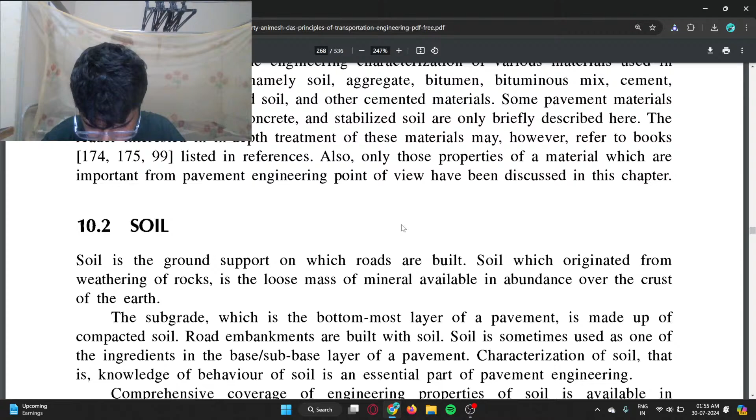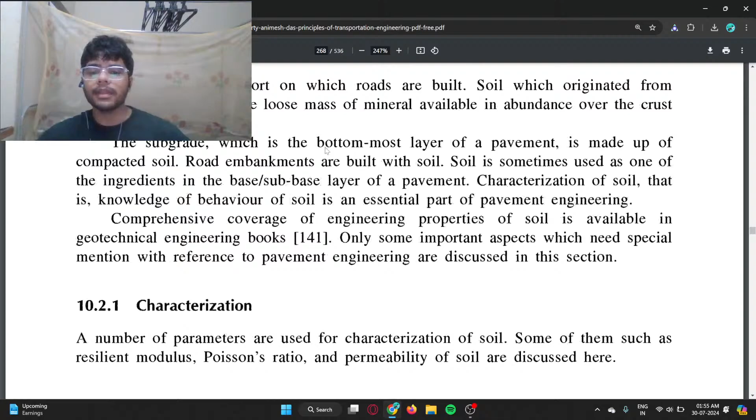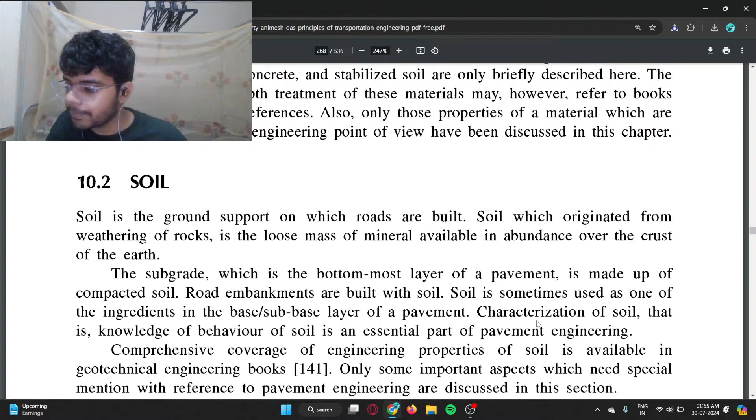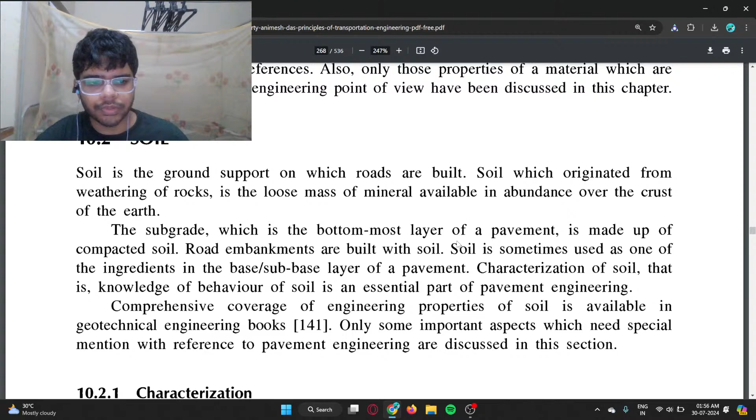Soil, which originated from weathering of rocks, is a loose mass of mineral abundance over the crust of the earth. The subgrade, which is the bottommost layer of the pavement, is made up of compact soil. Road embankments are built with soil. Soil is sometimes used as one of the ingredients in the base/sub-base layer of the pavement. Characterization of soil, that is knowledge of behavior of soil, is an essential part of pavement engineering. Comprehensive coverage of engineering properties of soil is available in Geotechnical Engineering books. Only some important aspects, which need special mention with reference to pavement engineering, are discussed in this section.

Number of parameters are used for characterization of soil, some of them such as resilient... Only some important aspects, which need special mention with reference to pavement engineering, are discussed in this section. Number of parameters are used for characterization of soil, some of them such as resilient...

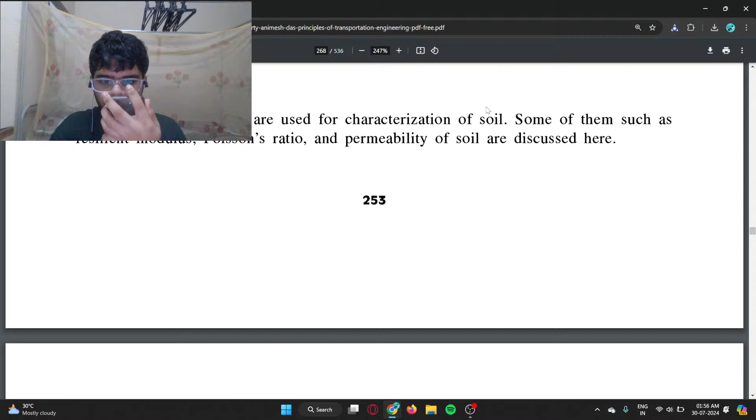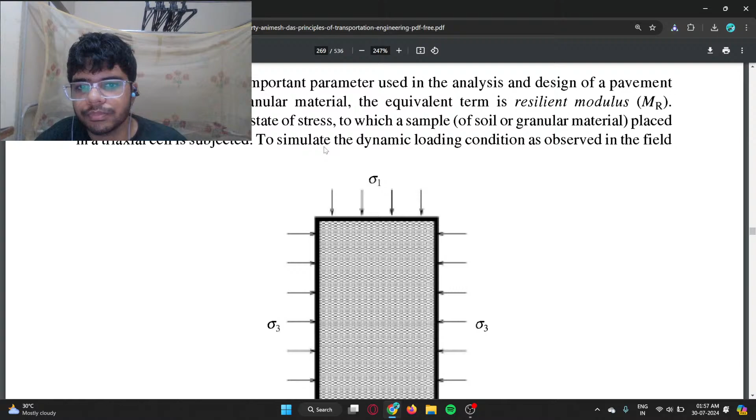We want to show the triaxial state of stress to which a sample placed in a triaxial cell is subjected, to simulate the dynamic loading conditions as observed in the field. Due to traffic, the stress sigma 1 minus sigma 3 is made pulsating. This dynamic nature of triaxial testing is intended to match the loading and unloading durations in the same way as they occur in the in-service road. Deformation of samples occurs when the load is applied to it, and recovery takes place when the load is removed.

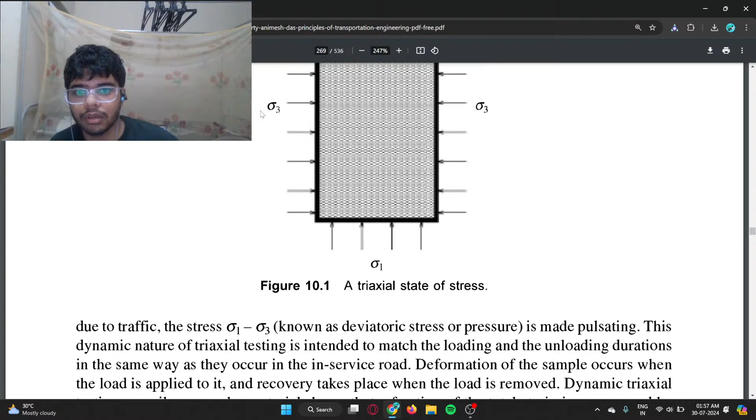I'm just reading words, I'm not even comprehending what I'm saying. Okay, due to traffic, the stress sigma 1 minus sigma 3, known as deviatoric stress or pressure, is made pulsating.

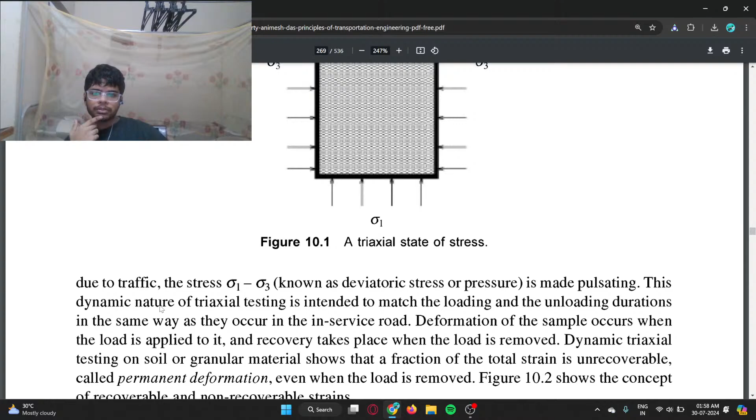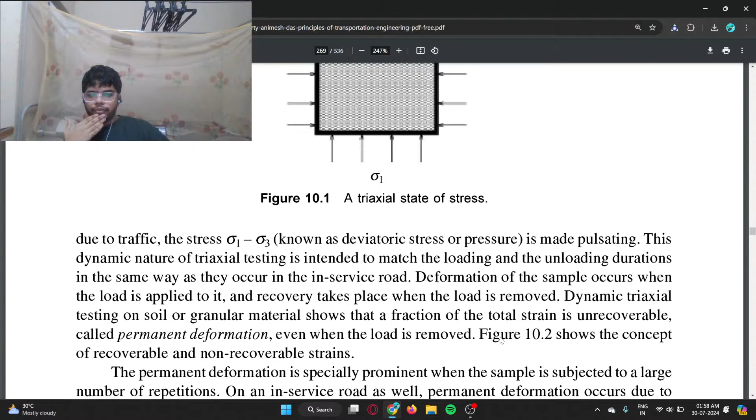Dynamic triaxial testing on a soil or a granular material shows that a fraction of the total strain is unrecoverable, called permanent deformation, even when the load is removed. Figure 10.2 shows the concept of recoverable and non-recoverable strains.

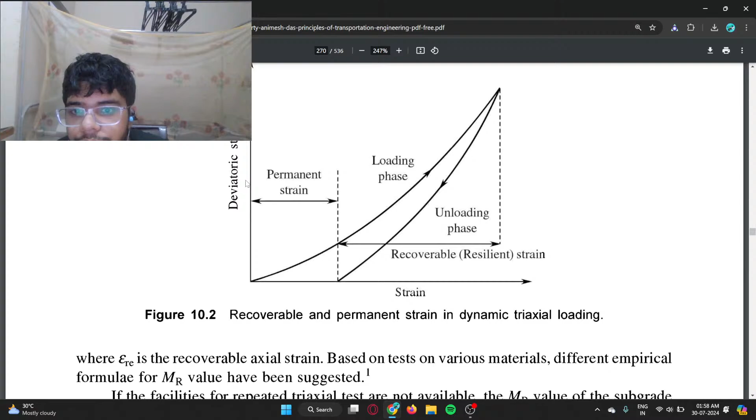Deviatoric stress. Even when the load is removed. Figure 10.2 shows the concept of recoverable and non-recoverable strains.

Deviatoric stress. I don't know, I'm not very clear when I speak. I tend to, in my habit of trying to sound like foreign people, like Jacksepticeye and people like that, say things oftentimes like rutting instead of putting emphasis on the T, I replace T with the sound of D, like rutting. Try to sound fancier than I actually am. It's accepted when people like that, but oftentimes rutting instead of putting emphasis on the T, I replace T with the sound of D, like rutting.

Try to sound fancier than I actually am. I don't know, I'm getting self-conscious about the way I'm speaking English. Not that I think about it. It is kind of fucked. My English, it's not as good as I thought it was.

The permanent deformation is specifically prominent with the sample subjected to a large number of repetitions. On an in-service road as well, permanent deformation occurs due to repetitive traffic loading called rutting. Rutting is discussed in detail in section 12.

Defined as deviatoric stress divided by recoverable strain. Stress divided by strain, that's modulus of resilience, or rutting. Resilient modulus, yeah. Okay, makes sense. Stress over strain, that's a modulus, yeah. Where is the recoverable... Recoverable strain, permanent strain, okay.

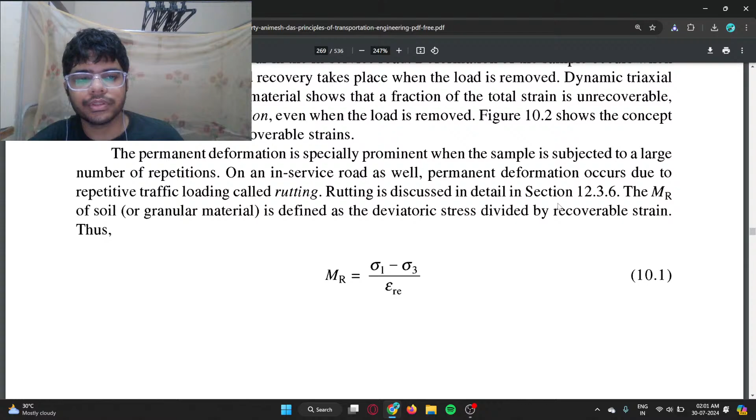Finally, deviatoric stress divided by recoverable strain. The recoverable strain based on test, different empirical formulas have been suggested. If the facilities for repeated triaxial tests are not available, the MR values of subgrade soil may be estimated from its CBR value with the help of the following equations. What the fuck is a CBR?

Strain based on test, different empirical formulas have been suggested. If the facilities for repeated triaxial tests are not available, the MR values of subgrade soil may be estimated from its CBR value with the help of the following equations. What the fuck is a CBR?

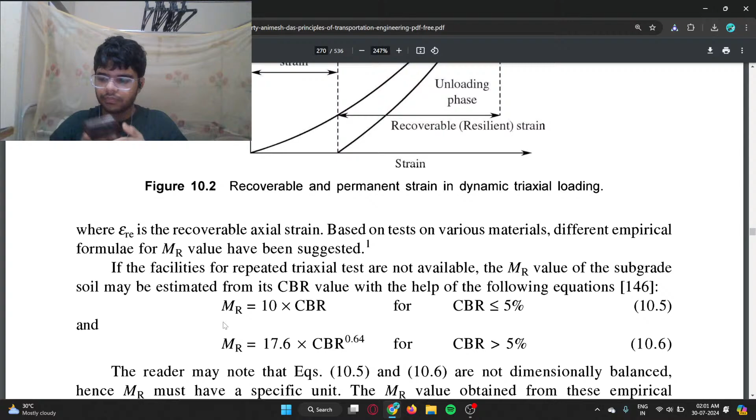Reader may note that equations 10.5 and 10.6 are not dimensionally balanced. Hence, MR must have a specific unit. The MR value obtained from these empirical formulas is in MPa units, megapascal. Equations 10.5 and 10.6 are also recommended by the Shell Pavement Design Manual. Oh, the company Shell.

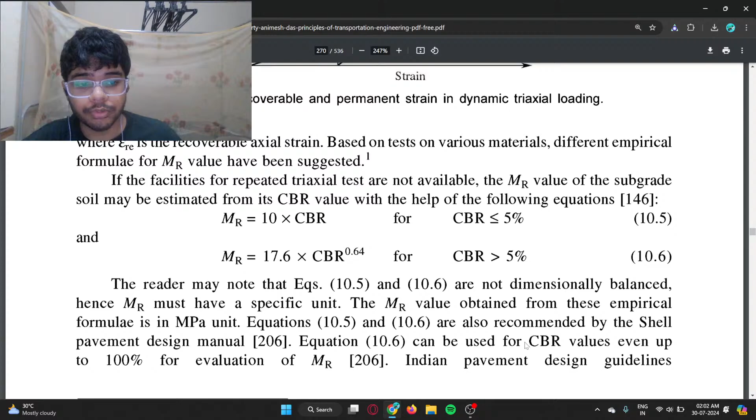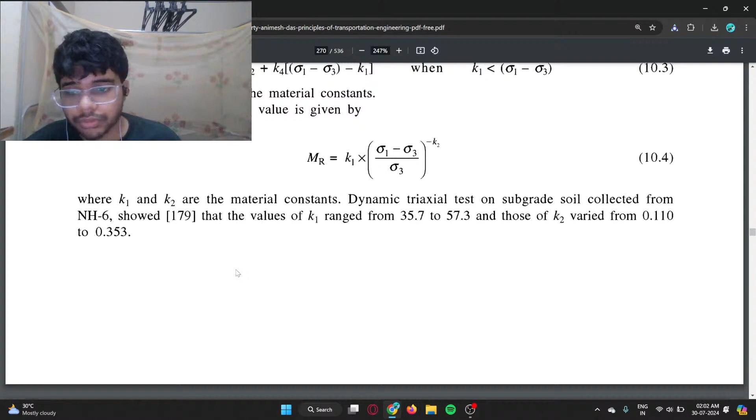Equation 10.6 can be used for CBR values up to 100% evaluation for MR. Indian Pavement Design Guidelines. Sure. Guidelines recommend both equations for computation of MR value of soil. Pavement design guidelines published by the Asphalt Institute.

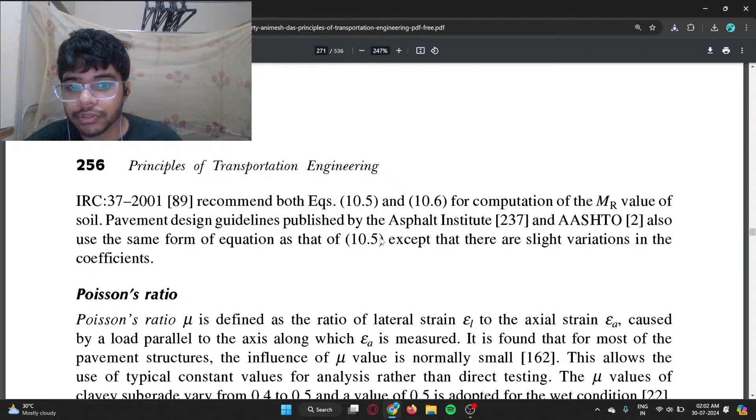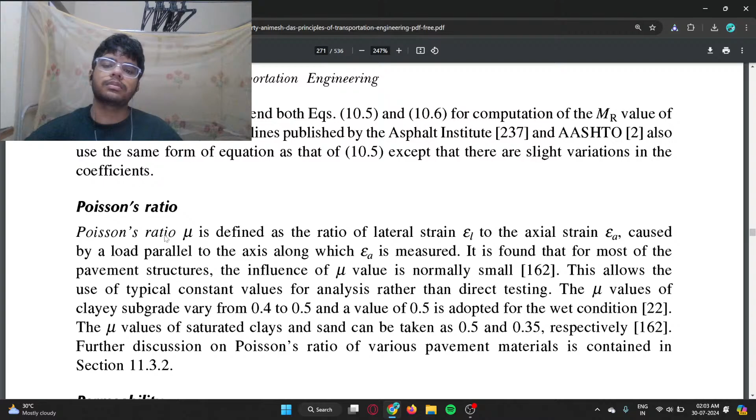What the fuck? There's an institute for asphalt, okay. And AASHTO. AASHTO also uses the same form of equation as that of 10.5, except that there are slight variations in the coefficients. Poisson's ratio mu is defined as the ratio of lateral strain to the axial strain, caused by a load parallel to the axis. Okay, so let me summarize this whole resilient modulus thing that I just read.

Okay, so we have a section of a road. The road experiences some stress, and the stress is pulsating. Why is it pulsating? Because as the car passes over it - it doesn't stand there forever. Cars pass over the section of the road that we're analyzing, so the stress comes and goes. There's peaks and valleys. That's why during our testing we apply pulsating loads.

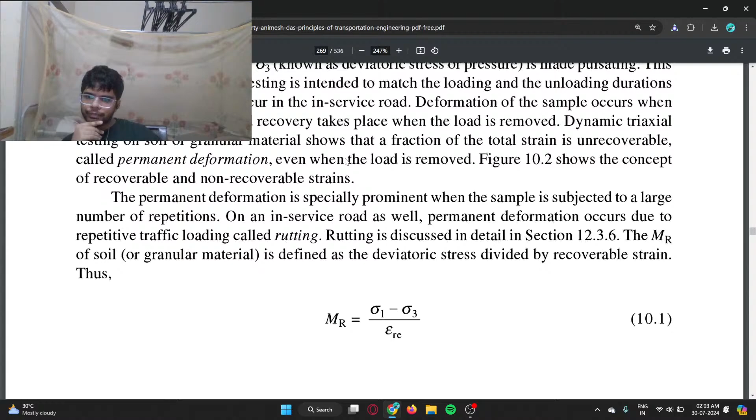During whatever deformations we do observe, there's a certain part that's permanent strain and recoverable strain. Recoverable strain is basically the Young's modulus type strain - you stretch it by a certain amount, it comes back by that exact same amount. But in this case, there's also permanent strain - if you stretch it by a millimeter, it'll only come back by 0.8 millimeters. There'll be a 0.2 millimeter permanent strain. It'll be stretched forever.

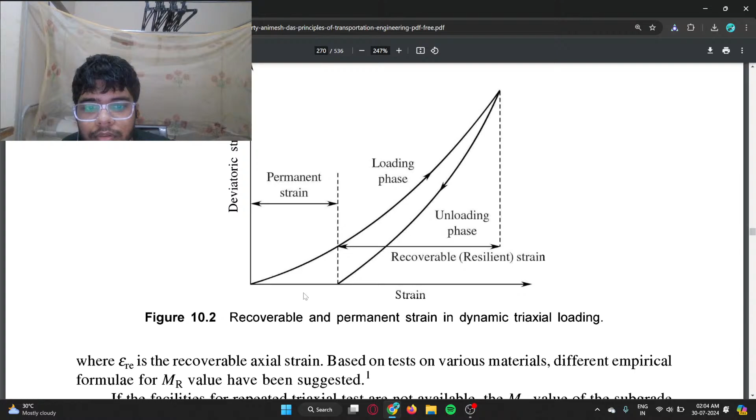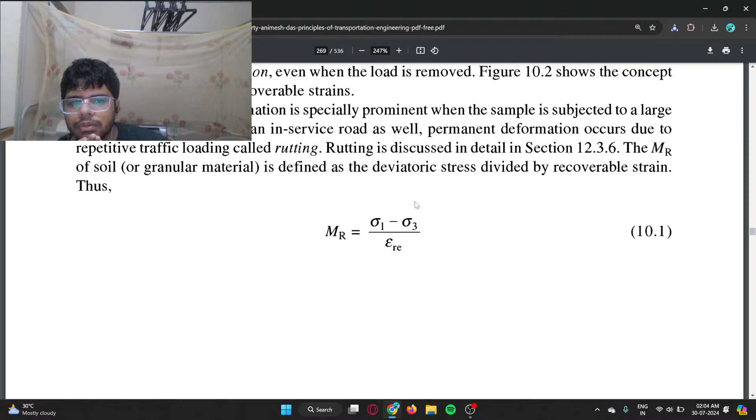Resilient modulus is calculated by subtracting the axial stress by - no, why - by the lateral stress. But why?

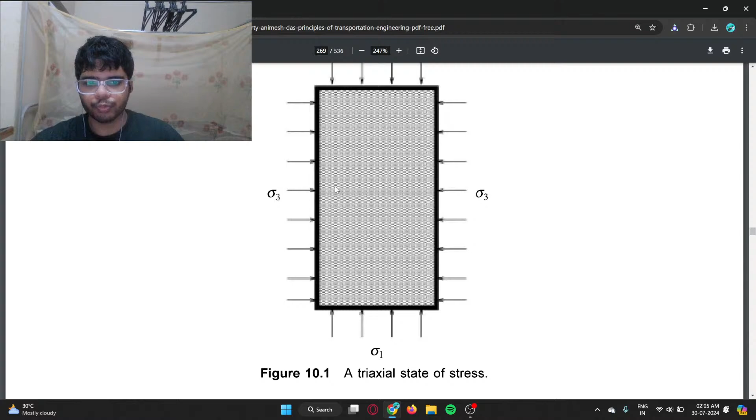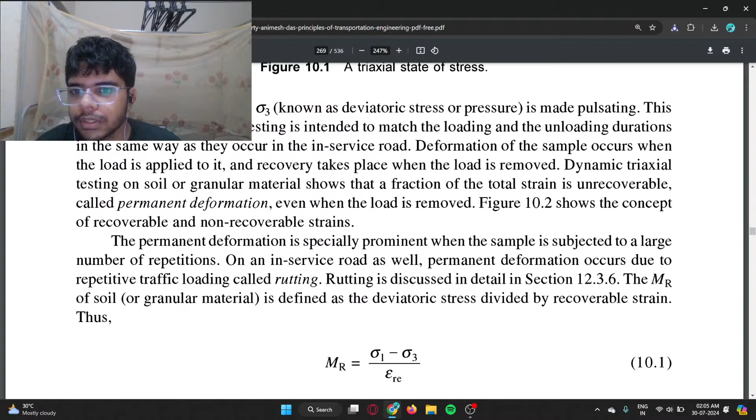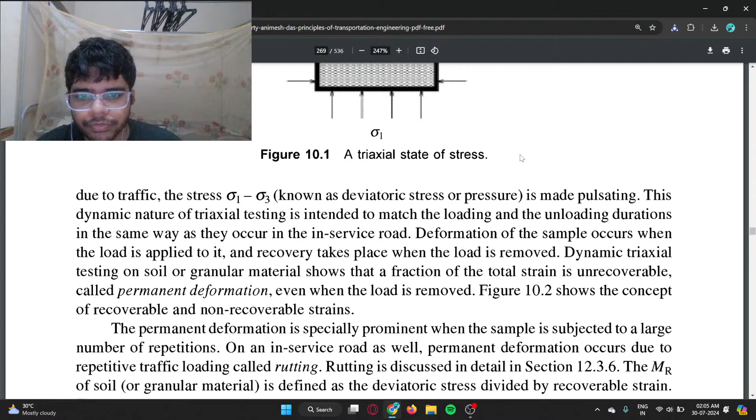Okay, okay, I understand. Because if you're looking at a section that's rectangular, the stress is from this side, from sigma 3. The horizontal stresses will try to squish the material from both sides, which will in turn push this part of the road out. But in the case of the vertical stress, sigma 1, it's trying to push this side inwards while pushing these sides outwards, so they're counteracting each other. That's why whenever we are considering a deviatoric stress, we subtract sigma 1 from sigma 3, or sigma 3 from sigma 1, whichever is greater. I think usually sigma 1 will be greater, it's just my gut feeling.

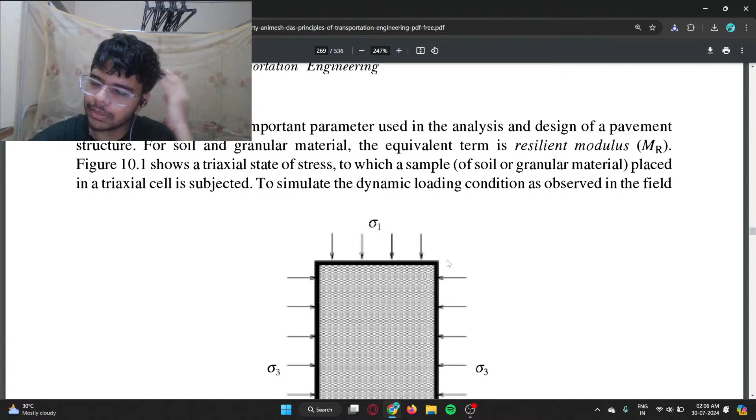It also makes sense because as the car is passing through it, the immediate contact point of the car is on the top of the road, not from the side. So the side forces will be lesser. That's my prediction.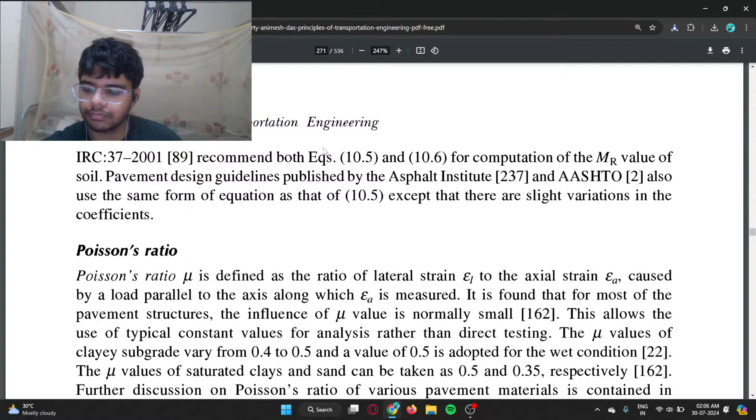Poisson's ratio is the ratio of lateral strain to axial strain, caused by the load parallel to the axis along which axial strain is measured. It is found that for most pavement structures, the influence of mu is normally small. This allows the use of typical constant values for analysis rather than direct testing.

The mu values of clayey subgrade vary from 0.4 to 0.5, and a value of 0.5 is adopted for the wet condition. The mu values for saturated clays and sand can be taken as 0.5 and 0.35 respectively.

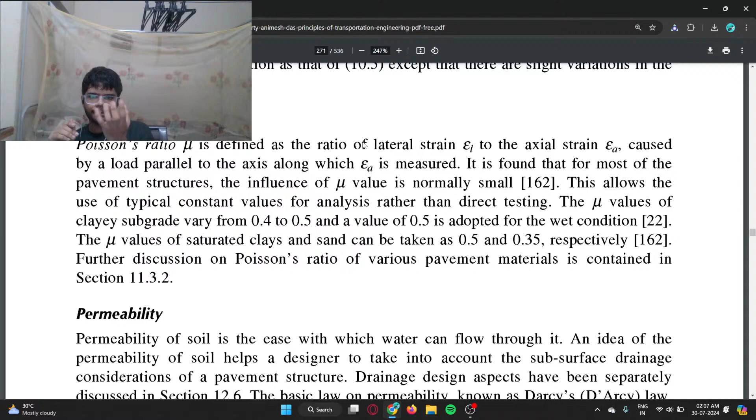So sand has a lower Poisson's ratio, which means that for a given axial strain, there will be less expansion on the other side. It will be more compacted. That makes sense because sand has tiny particles that pack easier. I think that's what I think of it as.

Poisson's ratio of various pavement materials is contained in section 11.3.2. Permeability of soil is the ease with which water can flow through it. An idea of the permeability of soil helps the designer take into account the subsurface drainage considerations of a pavement structure.

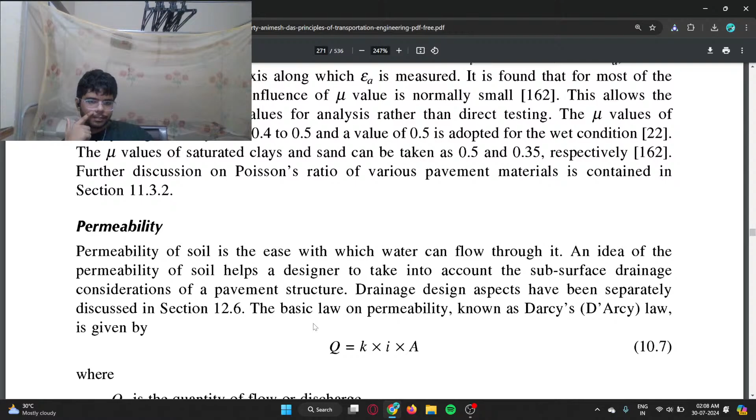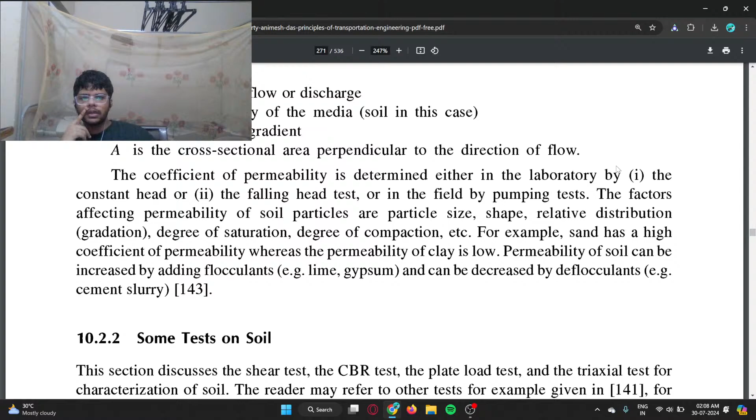Permeability, sure. Drainage design aspects have been separately discussed in section 12.6. The basic law on permeability, known as Darcy's law, is given by Q equals KIA. The coefficient of permeability is determined either in the laboratory by the constant head or falling head test, yeah, we've done those, or in the field by pumping tests.

The factors affecting permeability of soil are particle size, shape, relative distribution, and gradation - the relative distribution of the diameters of the particle sizes. There's a range of diameters in particle soils, so the more of the spectrum it covers, the easier it will pack and the less holes there will be.

The less holes there will be, the less pores there will be, and that will result in less permeability of the soil, which is good because it prevents drainage or seepage, or both actually.

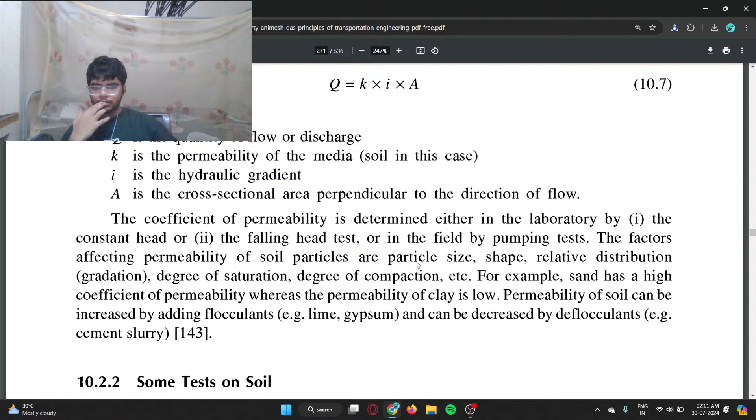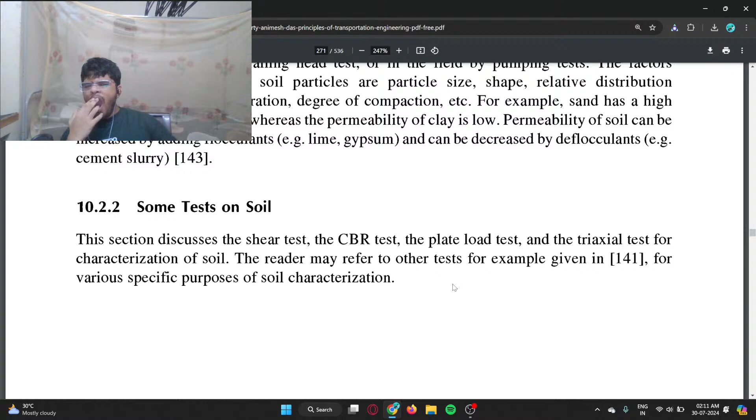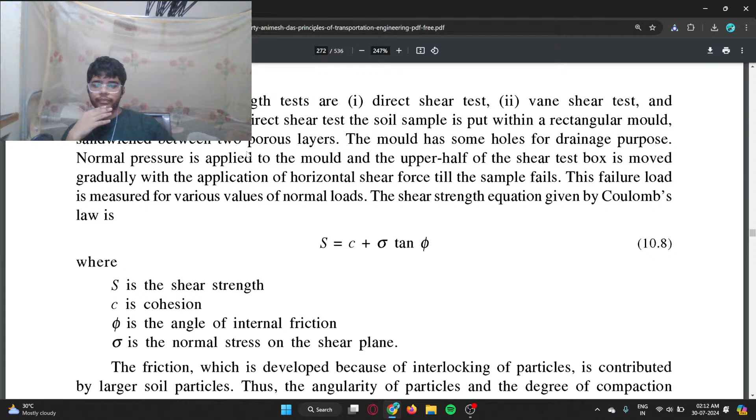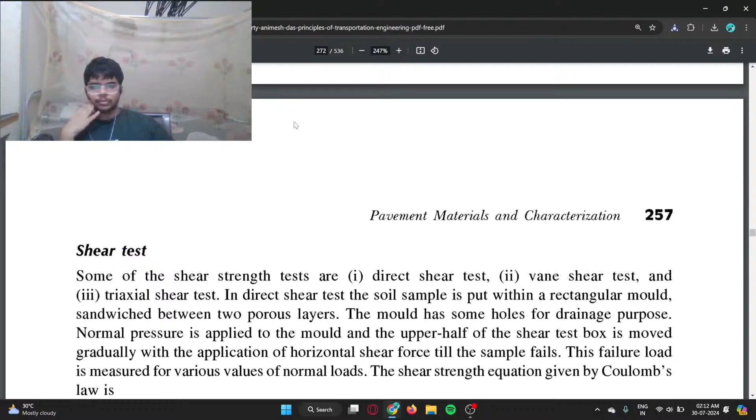What the hell is this saying? I zoned out. What is this test? I zoned out. Let's watch some YouTube.